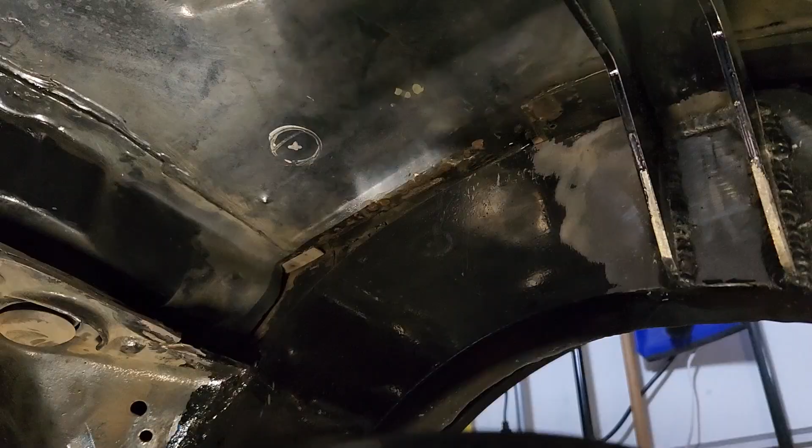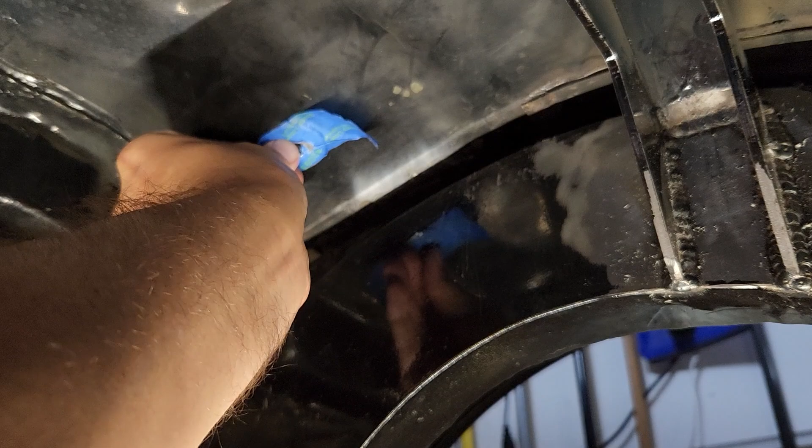You guys recall before I cut this out, I traced the location of that center coilover location. One of the issues with scanning is most scanners don't like black, shiny surfaces like this, so I'm probably going to have to tape it up. This may come through as an image, but just to add another layer of surface, I'm going to tape a washer up here so we're perfectly centered, and so when we do our surfacing tool or our imaging, we'll be able to see that washer at a minimum, and that's where that location is. So I'm going to blue tape the rest of the black shiny area, and I'll probably add another dimension just to make sure we're at the perfect scale when we import it into the CAD software.

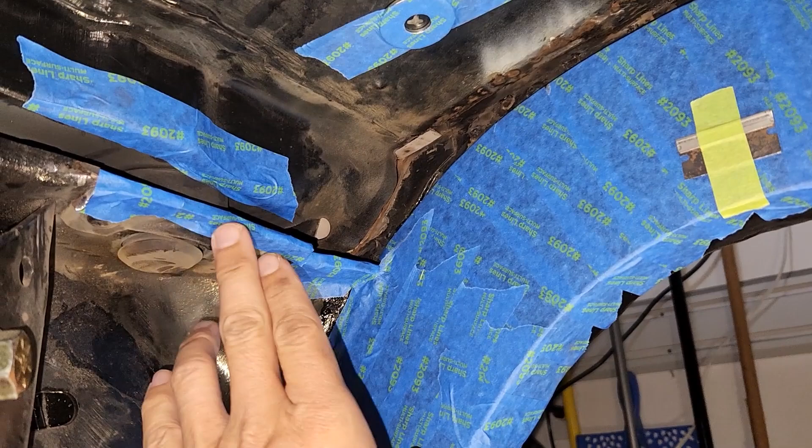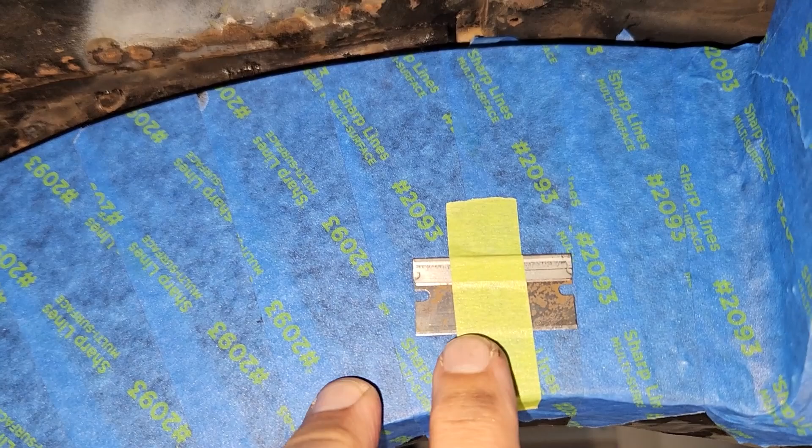Here's what I came up with. I went ahead and taped all my important edges. I want to mount to this edge. I think I also want to weld to this surface, and I also definitely want to weld up in this area. So I taped all those important edges, and I came up with this idea: why not just use a razor blade? Because it's also 3D, it's got a profile and a finite measurement. We can measure that and then compare it in CAD to make sure everything comes across in the right scale.

So here we go, let's get to scanning.

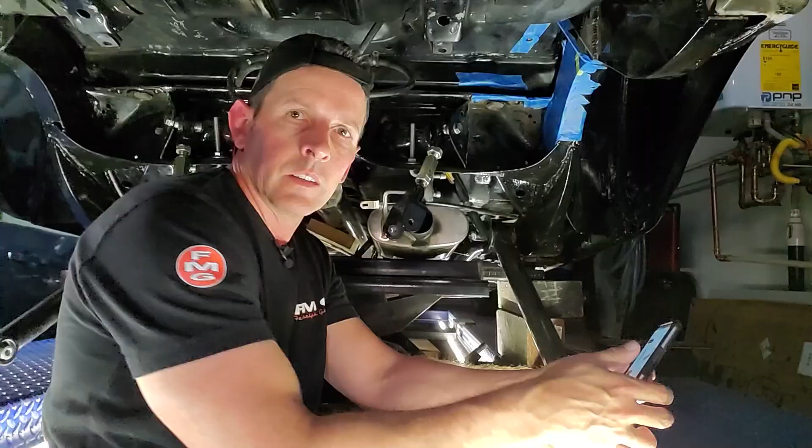Now, before we start taking pictures here, I want to be crystal clear with you guys. There are several ways you can scan an area, and I've done this already on a prior project—you guys might have seen it when I did the oil filter bracket. This one's a little more complicated because we have specific points we have to weld to, and I went ahead and tried the professional version of the last app I used, and it really didn't come out that well. I also tried a legit 3D scanner, it costs like $700, and that too didn't work out very well. So being crystal clear with you guys, I found another app.

It's called Polycam, I'll leave a link below. You can scan to your heart's content, and if you want to download a file, you can do a free trial of the app—you get a 5-day free trial and can download a file, which is actually what I did. Or, if you like doing 3D printing, it's $100 a year membership and you can download as many files as you want. Now the beauty of this particular app is you can take up to 2,000 images per download, so that's exactly what we do here.

We're just going to go around and take pictures from as many angles as we can get. It will stitch those pictures together and give us a 3D image—just a surface, with no thickness to that layer—and then we'll take that and put it into CAD. So I'm going to go ahead and get started and take a whole bunch of pictures. Where is the go button?

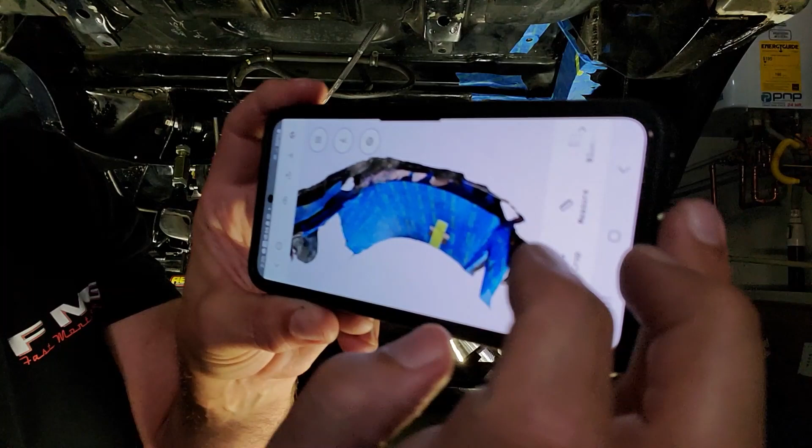It didn't come out as nice, so OBJ worked best for me. So you go ahead and upload that, and it comes to look like this. This will actually blow your mind. There's that area, there's the piece of tape with the razor blade, and you can spin it around.

That's crazy, right? So let's go ahead and jump to Onshape and show you what to do next. Welcome to Onshape. This is our solid modeling tool that I'm using.

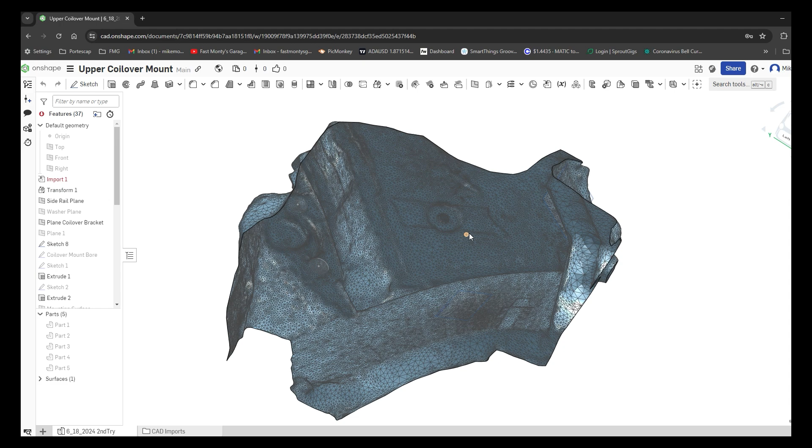It's actually a cloud-based software. It's less restrictive on your computer's memory. And they have a free license for hobbyists, just like us.

So this is what the image looks like when we import it, and it's just a shell. And you have to transform the dimensions here. That's why we put the razor blade, remember that?

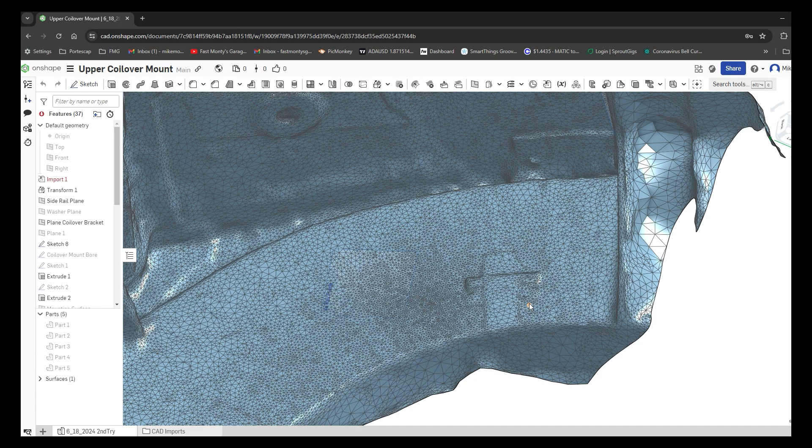And you can see the tape thickness, and we know the tape thickness, so you can set your ratio for transform. That's the tool I used, and we can even see that washer. I mean, how cool is that?

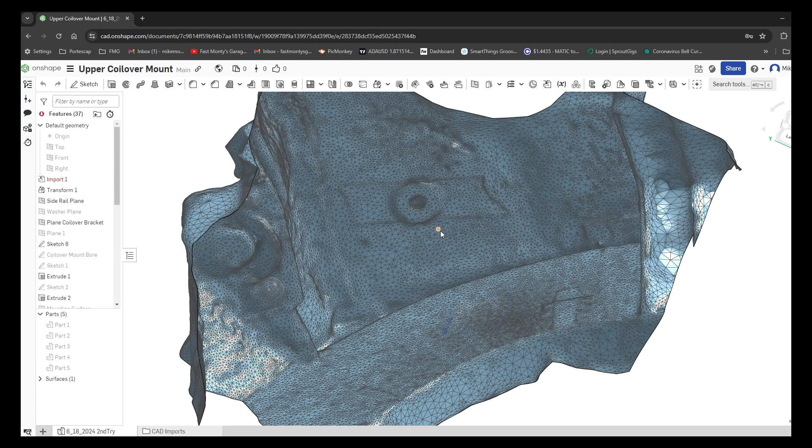So the plan here is I want to create a bracket that goes from this edge all the way to our support over here. You can see the side of the support, and we'll probably utilize some of the side frame here because that's a flat surface to weld to, and our load is going straight through, basically going up, right? So I want to make a bracket.

And the first thing you need to do in solid modeling is establish a plane to make an extrusion from, basically. So find a flat area, create a plane, and I had to play with this for a little while, and I'll show you what I came up with here.

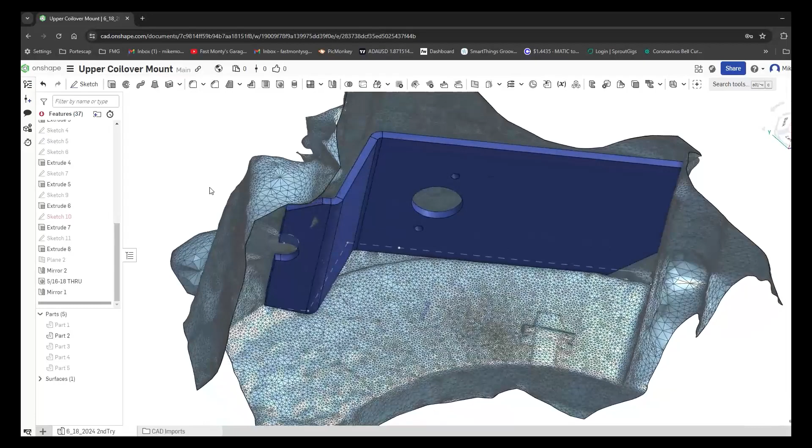Here we go, is what I came up with, and it took an hour or so to play with, and I created the bore for the top of the shock, and tapped holes for our support.

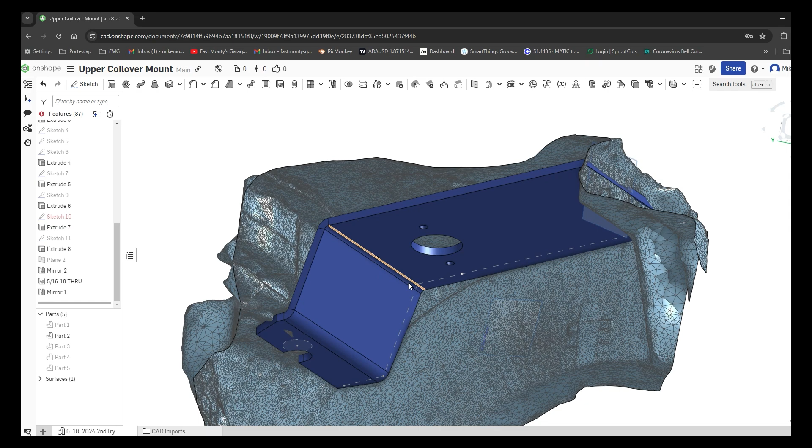My train of thought here is, after mocking up the coilover, I needed the output of the reservoir to come over and hopefully mount underneath the frame somewhere over here. But I made some relief for an existing rivet, but that's 98% there, I'd say.

And we can weld in this area, we can weld up here. And to add another support, why don't we add a gusset like that? So that'll give us some strength.

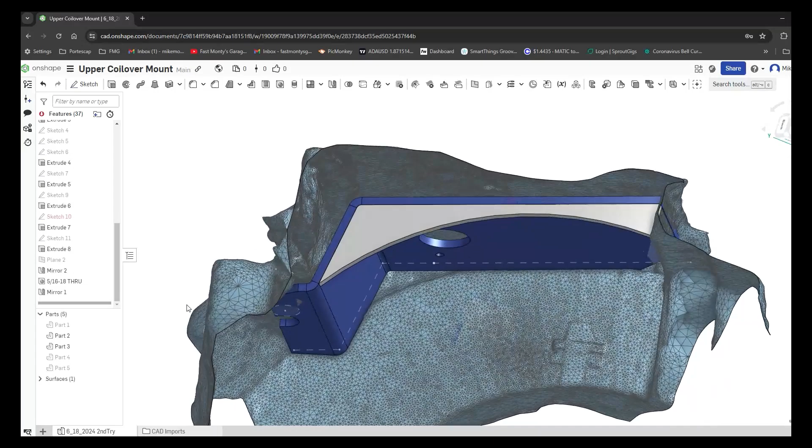And I think we're good with this side. Now the beauty of solid modeling is we can create a mirror image like that. So now we have 4 pieces, which is pretty awesome.

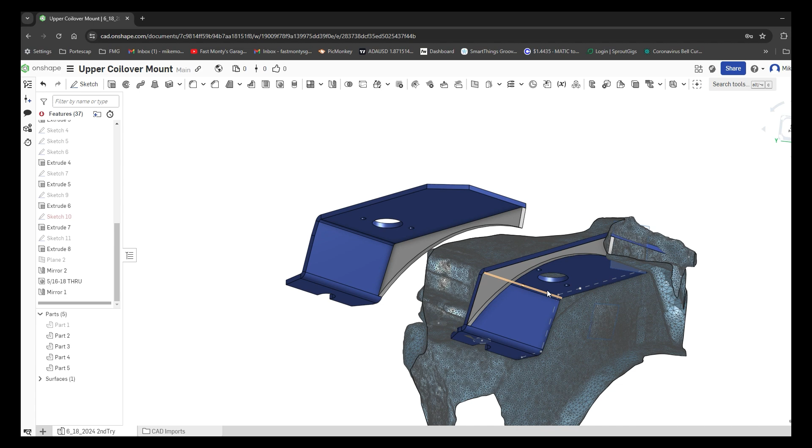Now our next step here, we need to send these parts to get cut, bent, etc. But SendCutSend requires what they call a flat file. Now most solid modeling systems like this can generate a flat file, which means it's basically a flat piece of sheet metal.

Check that out, with bend radiuses and everything. Now take note, the angles here are about 68 degrees.

So we can export this file flat and import it into SendCutSend's system to get these parts created. So let's go do that.

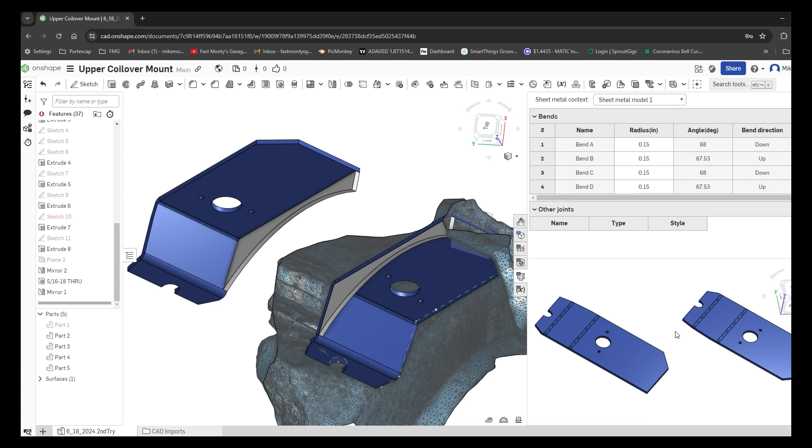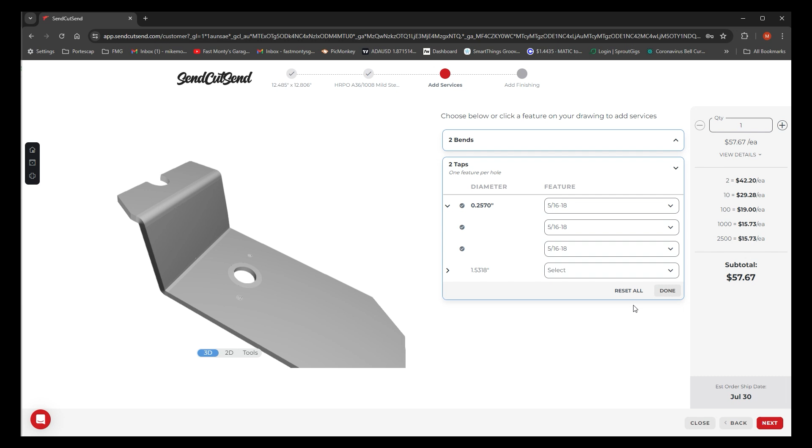And we are good. On the 1.5, we don't want any. So we're done. So 2 taps, there's our price.

We can hit next. You can actually pick powder coating, which is really neat. We did it on the last project, and you can even have them plated. We don't need any plating because we're going to weld and paint on our own.

Add to cart. We do the same process to all 4 parts. So we're going to do the 3 other parts, get our total and get it shipped. The hardest part now is waiting for it.

Here we go. All right, the hardest part is almost over. It has been 6 days. Remember, we sent the order in on a Tuesday. It's now Monday the following week.

I am super excited. I'm also nervous. Obviously, I mean, I want it to fit the first time, right? So let's cut it open, see what's up.

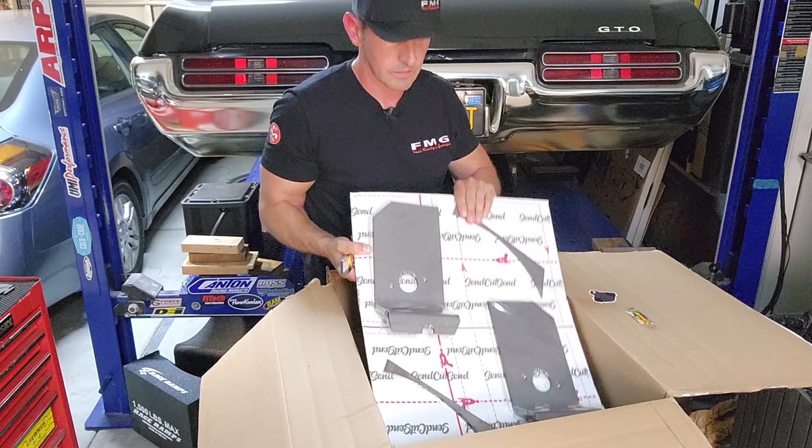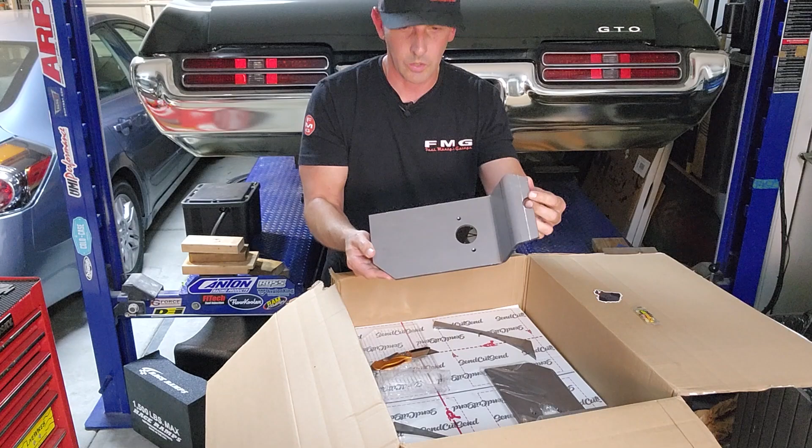Oh yeah, little sticker, Sour Patch Kids. Look at this. How bitchin' is that? Oh yes. All right, calm down. Let me take one of these out. I think it's this one, the right side. Oh, that is so beefy. Let me show you guys up close. How cool is that? All right, so we also had those tapped holes.

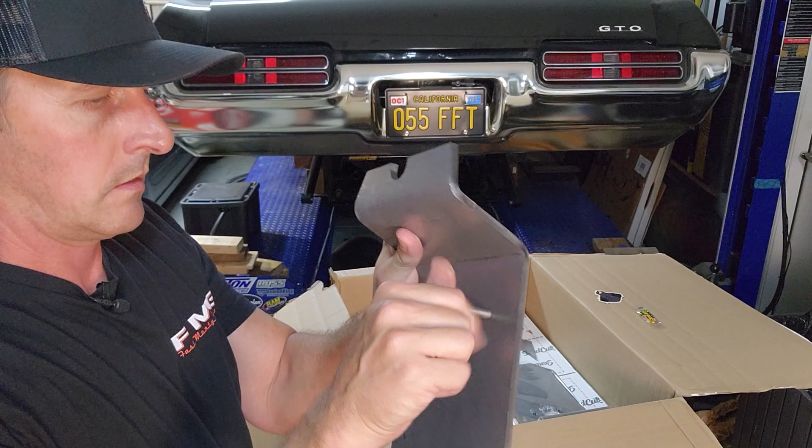Where's my test screw? Oh, yes, yes, yes, yes. Oh, bitchin'. Oh my God, how exciting. Yeah, sorry, it's the little things in life, guys and girls. Yep, both holes work great. That's a 5/16-18, remember? So that's bitchin'. Let's see how the cross support or the little gusset fits.

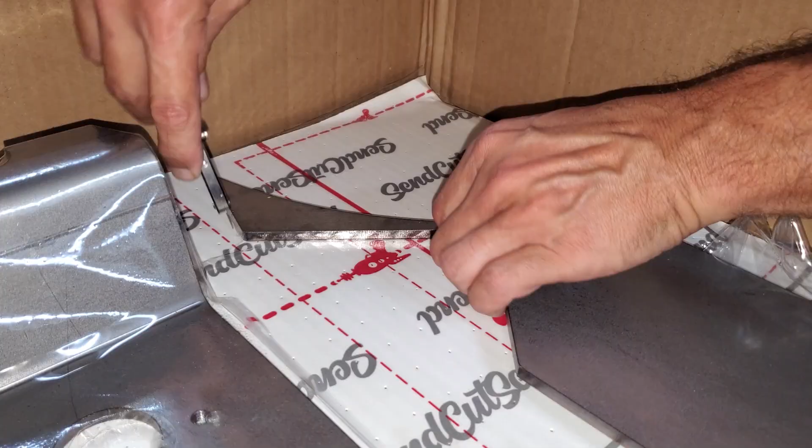Just setting up a little camera, add it to Instagram, right? But let me get this thing out of here. Okay, there it is. Let's see how she fits. Oh my God. Look at that. I know, I know, I know. Check it out.

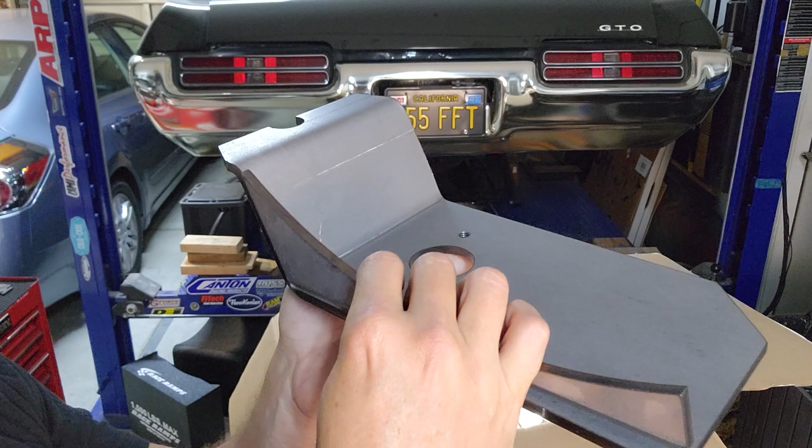Freaking perfect. So the plan here, obviously I'm gonna mock this up first, but we can tack this in while it's on the bench, then put it up in the car, and then we'll fully weld everything. But man, I'm excited. Let's go mock it up.

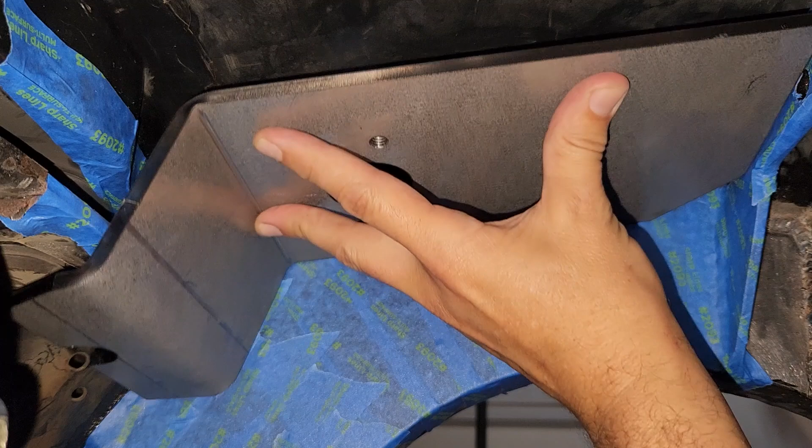Okay, let's see. Oh, hell to the yes. Look at that. That is awesome. Okay, right here, I knew this was gonna happen, but there's a little edge that comes down. It's like part of the lower bracket that we cut off. I need to cut that off so it's flush. That's the only thing getting in the way. I knew that was going to get in the way, so I just have to cut that off with a cutoff wheel. But we are good because it's flat all the way along there.

And then this recess is for a little rivet here that's still existing, and that's lining up perfectly. But everything is coming together, boys and girls. I mean, look at that. After I trim that piece, we can weld as the plan was. Here, here, here, along the top here, and we are perfectly lined up with the washer.

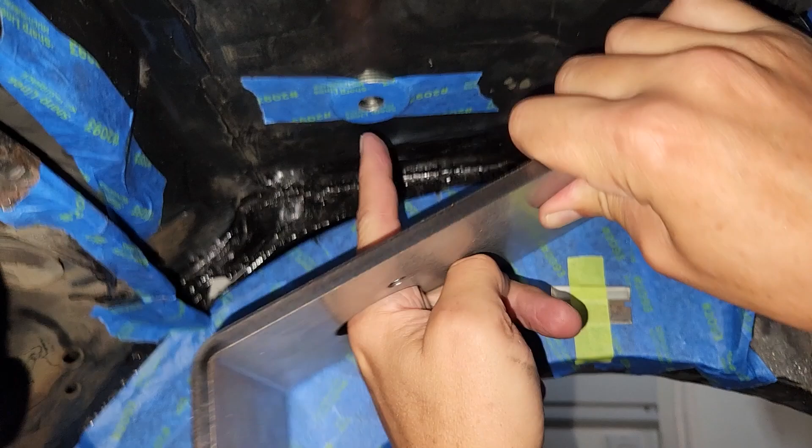Hey-o! Let's go! All right, I got the support plate welded in. I decided to weld it while it's on the bench, and it looks pretty killer. The reason it has this shade of grayness to it is I also coated it in Picklex 20, which is phosphoric acid. You can use Afterblast from Eastwood, you can even use POR 15's metal prep. It's basically all the same stuff. So it chemically etches it, but it's ready to go. You can weld through it and everything.

So I'm gonna go ahead and mock it up in the car. I did make one modification, which is I removed that tab. It was hitting the body mount, so I'll show you that when I get it mocked up. But man, this is coming together, and yeah, this is thick. This is 1/4 inch. I probably could have gotten away with 3/16, but it is super sturdy. I can't wait. Let's go throw it in.

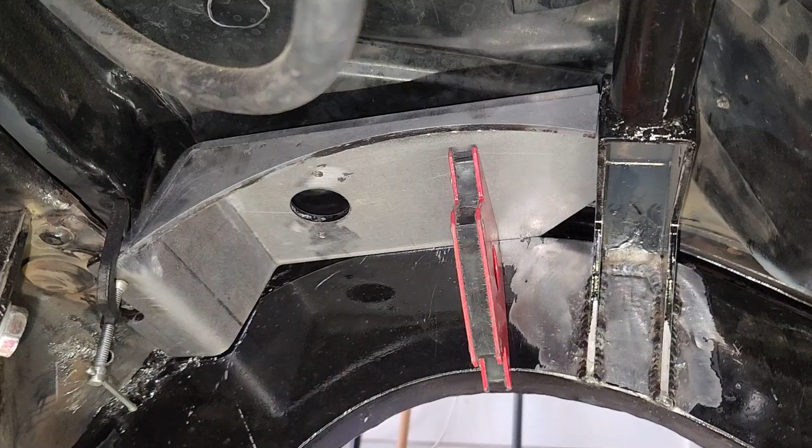There we are, mocked up. So I know I'm 90 degrees with that to this side surface, which was the plan. And we have enough welding space here, tiny gap, weld, weld, weld. And then this is the area I told you about. See, there's the rubber mount. So I cut that out just straight across to that existing rivet, and it fits perfectly. Pretty excited that it fit without a lot of cutting or grinding or modifying.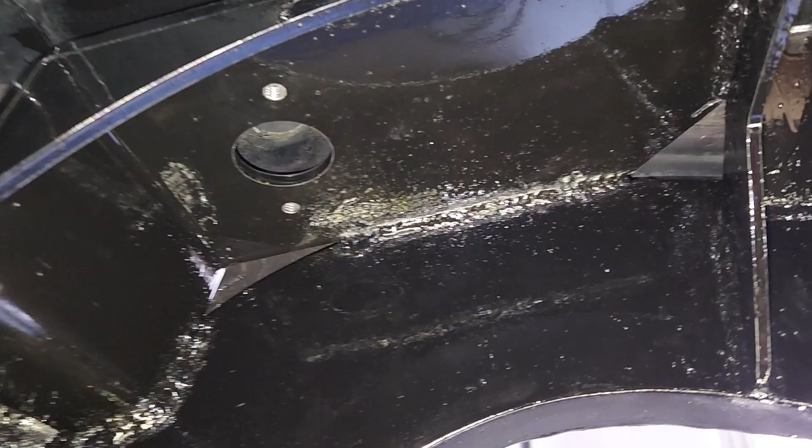I'm gonna go ahead and mock up the other side to make sure we're symmetric and get to cleaning and welding. So the next step, I should show you the finished welded in product. Oh yeah, there she is, welded in and painted. That's POR 15. Man, that's looking good. Now let's go ahead and mock up the coilover and make sure we planned ahead correctly for the reservoir.

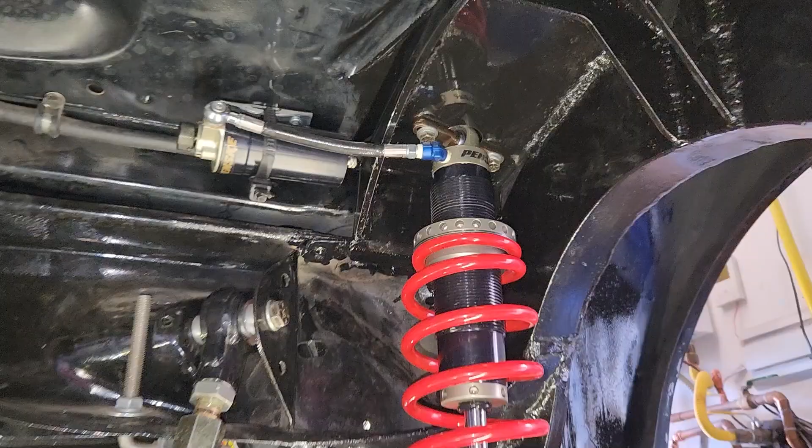Oh yes, we are in. I love it. Found a new spot for this too, easy to get at. Obviously jack up the car to get to that, but you have to do it anyway. Nice freedom of movement here. And man, this is getting exciting.

Almost back to getting on the road. Now let's go hit the workbench, show you how long that CAD workup took and the whole project, including welding, painting, and everything. Let's do it. There we have it. That does not include CAD. CAD was about 3 hours basically in total. So take that number, almost 10 hours, multiply by $100 if you're on a low budget shop, or multiply by $200, which is the new going rate to get your work done by someone else, including CAD work. CAD work can go up to $300 an hour.

So yeah, it's nice to learn it on your own and save all that labor. I hope you guys learned a lot this episode. I sure did. There's always something new in the CAD world, and I can't wait to do some more projects I have lined up. One will be a significant adder and boost. Anyway, did I say that out loud?

Next episode, we can finally put the Currie rear end in for good, but we're gonna measure for wheel size. Remember, we're going to 335 tires, and I already own the tire, and let's mock it up and see how to measure for wheels.